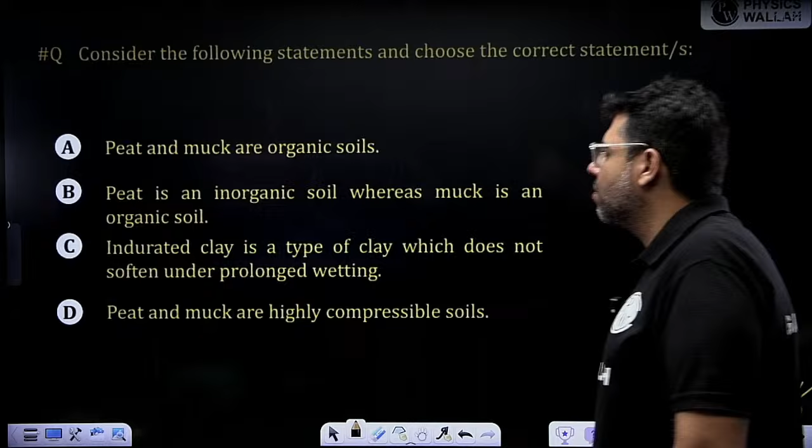So, correct answer is what? See, peat and muck both are organic soils. This one is correct, A is correct. Peat is an inorganic soil? No, peat is a highly organic soil, so this is wrong. Indurated clay - induration is the process of hardening of clay due to heat and pressure.

So indurated clays are hardened clays. They do not soften easily under prolonged wetting. This is hardened clay that is formed from the fusion of clays.

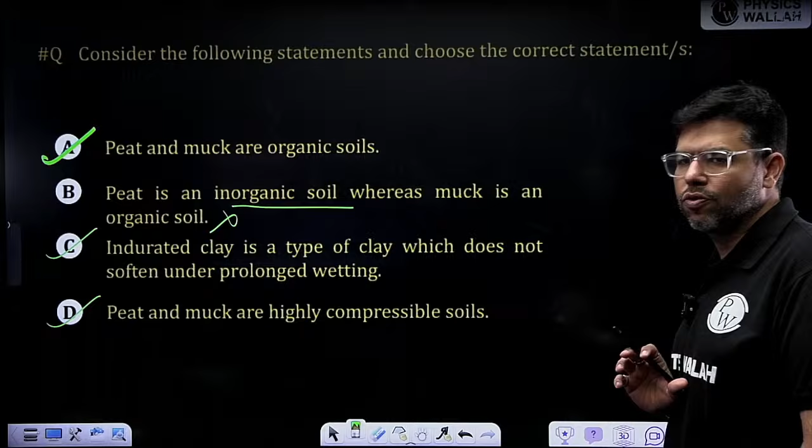So C is also correct and D is also correct. Peat and muck both are highly organic soils and both are highly compressible. Out of peat and muck, peat is more compressible, but both are highly compressible soils. So the answer is A, C, D.

These kind of questions you can very much expect in your exam as well. A, C, D - only 6 of you have given me the correct answer. Swagatam, very good. Vijay, then OG noob, I don't know your name, Ayush and so on. Very good.

Next question. Are you ready for the next question? Shall we see the next question now? Are you ready, my dear friends?

Let's see the next question now. Solve this one, mixing of soil. Very good question, I am giving you 2.5 minutes again.

Solve it fast. This kind of question we have done in our class as well. Make it fast please, then I will solve it for you.

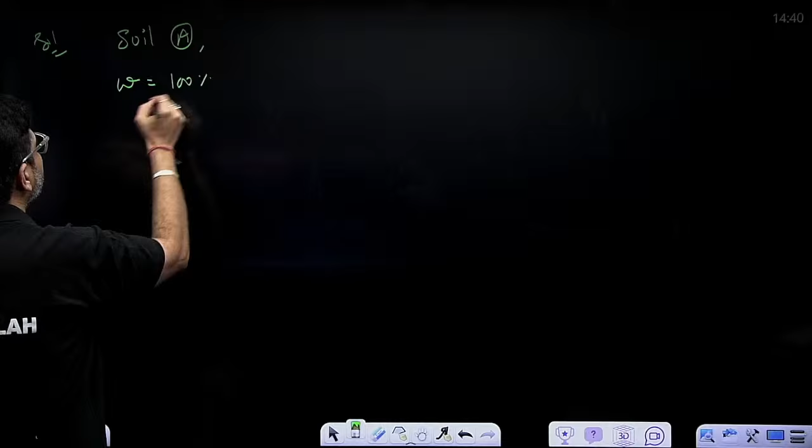Water content was given to me as 100%, weight is 1 kg. So weight of water plus weight of solids is equal to 1 kg.

Now weight of solids I can calculate first, that is total weight upon 1 plus W. 1 upon 1 plus 1, that is 0.5 kg. Weight of water is 1 minus 0.5, that is 0.5 kg again.

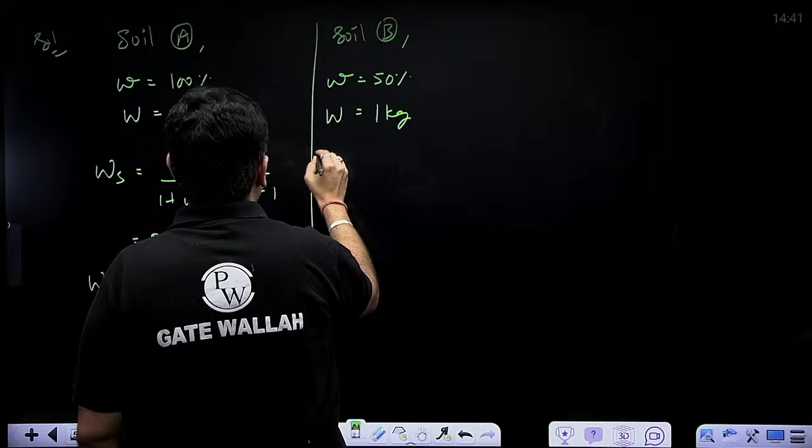Soil B: water content is 50%, weight is 1 kg. Weight of solid is total weight by 1 plus W again.

1 by 1 plus 0.5, that is 2 by 3 kg. Weight of water is 1 minus 2 by 3, that is 1 by 3 kg.

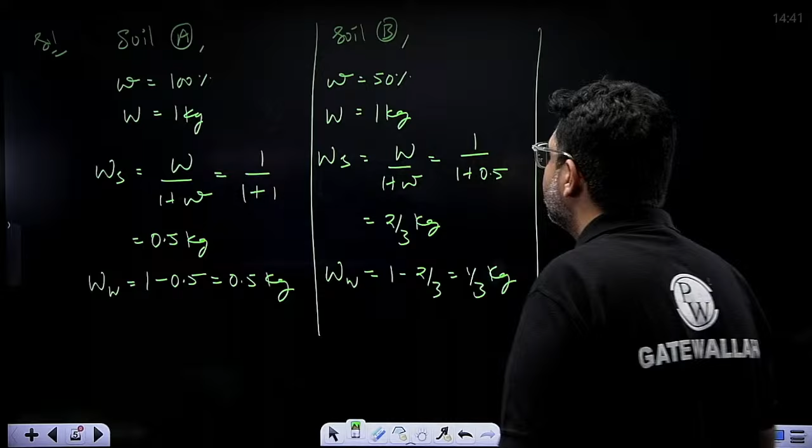Okay, done. So now, water content of the mixed soil for the mixture is weight of water by weight of solid. So when you mix those two soils, total weight of water will be 0.5 plus 1 by 3, and total weight of solid is 0.5 plus 2 by 3. Just individually add the solids as well as the water, okay.

Into 100, the answer will come out in percentage. What answer are you getting? Tell me fast, my dear friends.

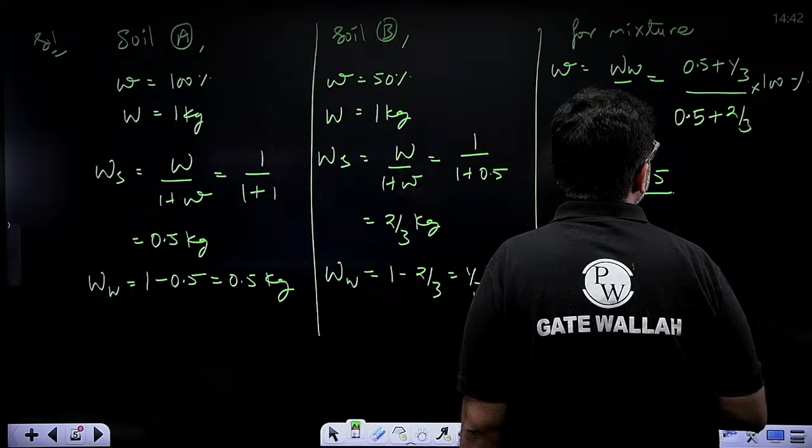Let me also calculate. So 0.5, okay, 3 5s are 15, so it is 2.5 divided by 3.5 into 100.

25 by 35 into 100. 71% you are getting, not 75%. Why have you given me the wrong answers? 71.43, approximately 71%, nearest answer. The closest answer is B. I don't know why have you all given me the wrong answers. B was the correct answer here.

Don't know how many of you were right here. Only 2 people, Master in Business and Ankit Yadav. Try to keep your correct name here, okay, that sounds good while reading as well.

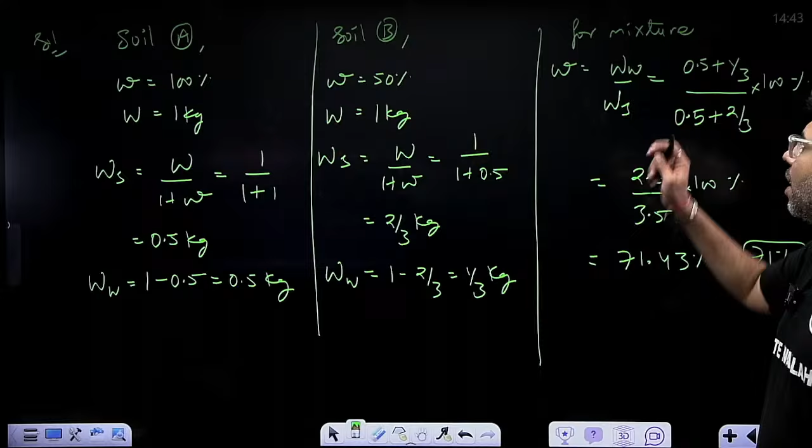Simple question though, not that tough. Chalo, let's do this question. Give me the answer in nearest integer, then only it will match. Give me the answer in nearest integer, okay. Report your answer in nearest integer, okay. This is also a good question, try to solve this.

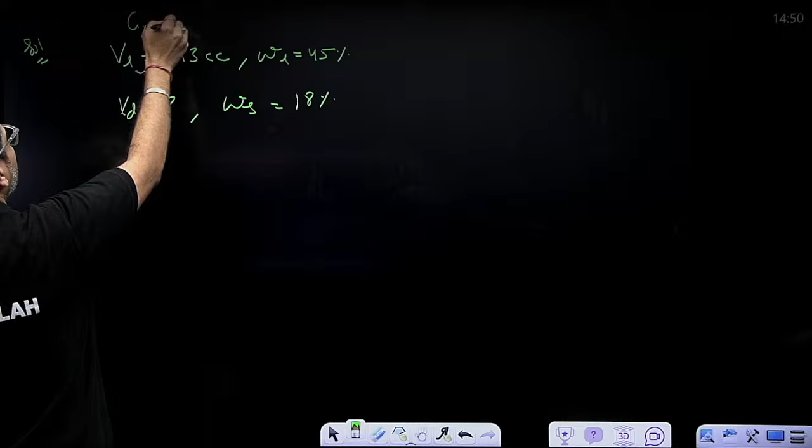Liquid limit was given to me as 45%. Now VD we have to calculate, that is minimum volume, and shrinkage limit was given to me as 18%. GS was also given to me. What was GS here? GS is how much, my dear friends? GS is equal to 2.73. Correct, very good. Now minimum volume which can be attained by the soil is, that is we have to find out VD, that is the dry volume corresponding to shrinkage limit.

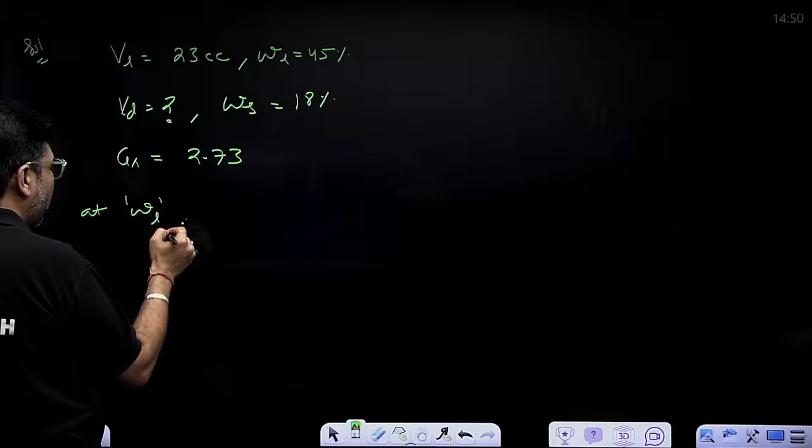We will find out. Now at WL, if I draw the phase diagram, I do not know any formula, I only follow the phase diagram approach. Solid volume will not change, weight of solids will also not change. Solid water, find out WS here, WS upon GS gamma W, GS I knew. This is WL, weight of water, WL into WS, it is WW, and volume of water is WL, WS upon gamma W.

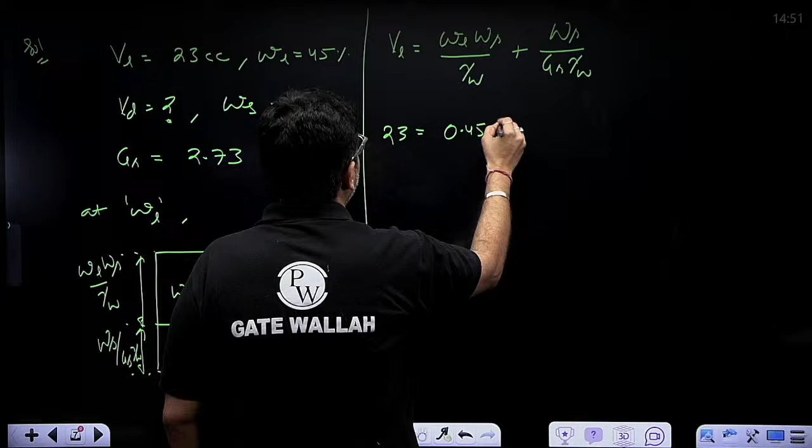Now VL is equal to what? WL, WS upon gamma W plus WS by GS gamma W, as simple as that. VL is 23 cc, liquid limit 0.45, WS I do not know, gamma W I will take it as 1 gram per cc, everything is in gram cc. WS I need to calculate, GS is 2.73.

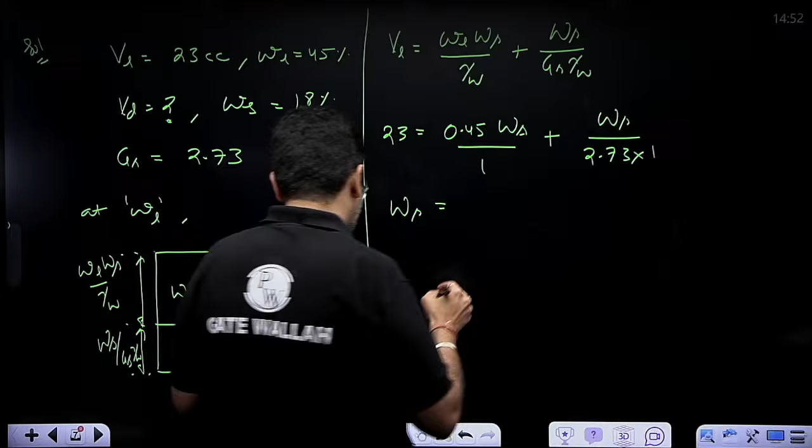Find out WS from here in grams, what is the weight of solids you are getting, and just substitute it to find out the VD. So WS is how much you are getting? 23 divided by 0.45 plus 1 by 2.73. 28.17, yeah, 28.176 grams, 176 grams.

Now at shrinkage limit, similarly we will write VD is equal to what? Just in place of WL, write down WS, weight of solids by gamma W plus weight of solids by GS gamma W. That's it, as simple as that. WS is how much, my dear friend? 0.18. 28.176 divided by 1 plus 28.176 divided by 2.73 into 1.

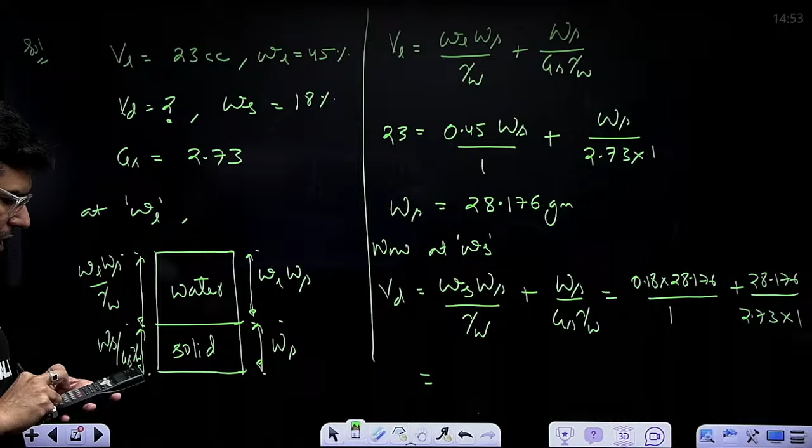So VD in cc you will get how much? Like this only you have solved. Nearest integer, I wanted the answer in nearest integer, my friend. You are not getting the instructions. Follow my instructions.

15.39. Someone have reported 15 as the correct answer, that was very much fine. 15.39 cc, nearest integer is 15 here. 15 was correct, okay. So if you are giving me 15 as the answer, that is very correct. Let's see how many of you have given.

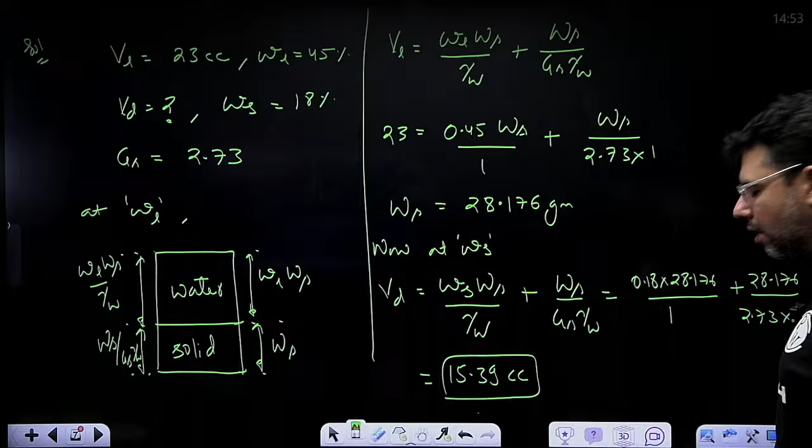Good question, many of you have given me. Vishu, Ankit, Ranjit, then Parth, Anvi, very good. Many of you have given me the answers, I am liking it. Let's see the next question, my dear friend. Very simple question on soil classification. Solve it fast, please.

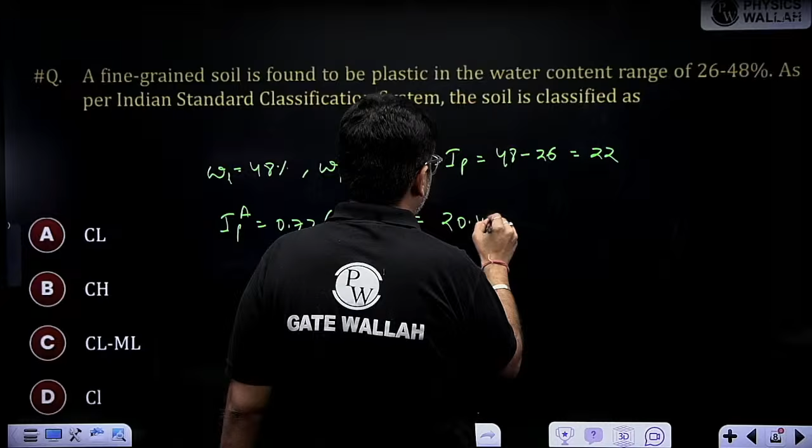Our IP is above this and liquid limit is less than 50%, and IP is greater than IPA. This implies CI, that is clay of intermediate compressibility, because it is above A line.

I don't need to show it, right? D is the correct answer. It will fall somewhere here, in this range. This point will fall somewhere here, IP and liquid limit above A line, that is in CI range. Okay, like this you can do this, very simple question to solve.

Any doubts here? These kind of simple questions also you can expect in your exam. D is the correct answer. Many of you have given me this.

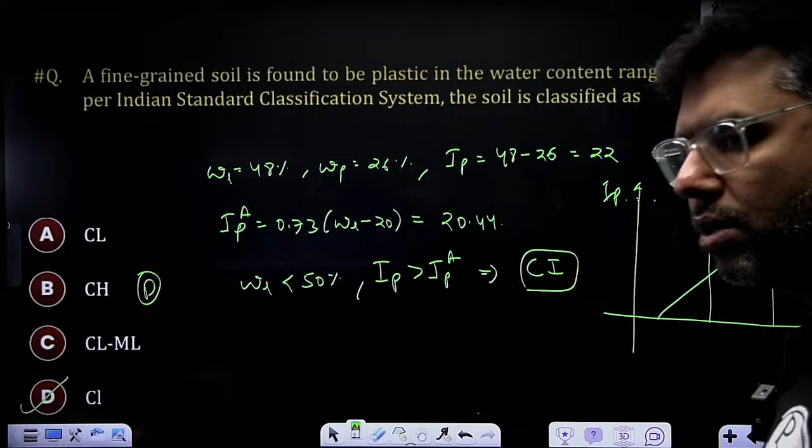Yeah, only seeing from WL you could have given the correct answer. Very good, so this kind of approach also you should have in exam. Just see the options, might be you can just eliminate the options easily. Without doing any detailed calculation also you can solve this question.

Very good. One question on compaction. Please solve this as well. Very simple question, please solve it.

MDD is the maximum dry density.

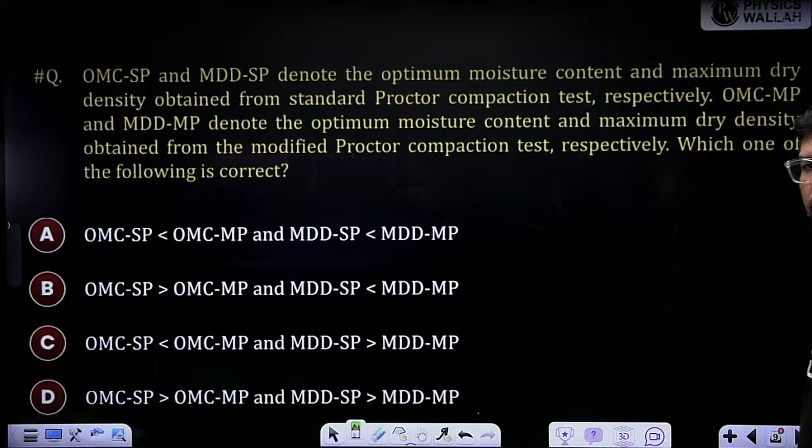So whenever you increase the compactive effort, we know our maximum dry density will increase and OMC should decrease, right? Maximum dry density increases and OMC decreases.

So maximum dry OMC of standard Proctor test will be more than OMC of modified Proctor test, and maximum dry density of modified Proctor test is more than maximum density of standard Proctor. B is the correct answer.

So due to increase in compactive effort, your maximum dry density increases and OMC decreases. B is the correct answer, my dear friend. MP is for modified Proctor test here.

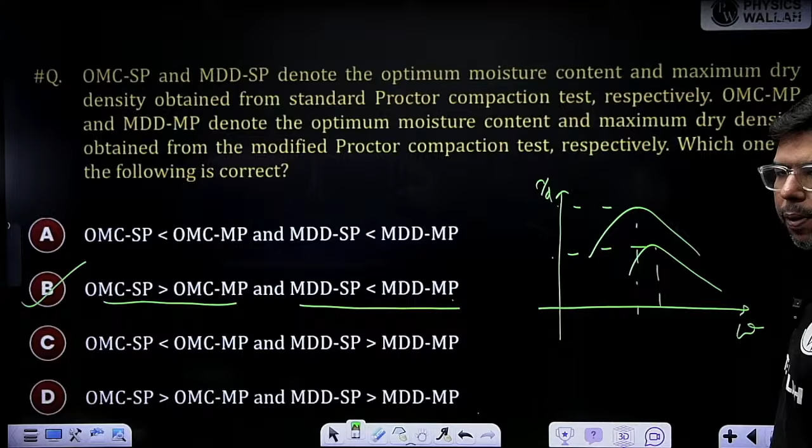Okay, B was the correct answer here. I don't know why many of you are giving me C as the answer, but B was the correct one.

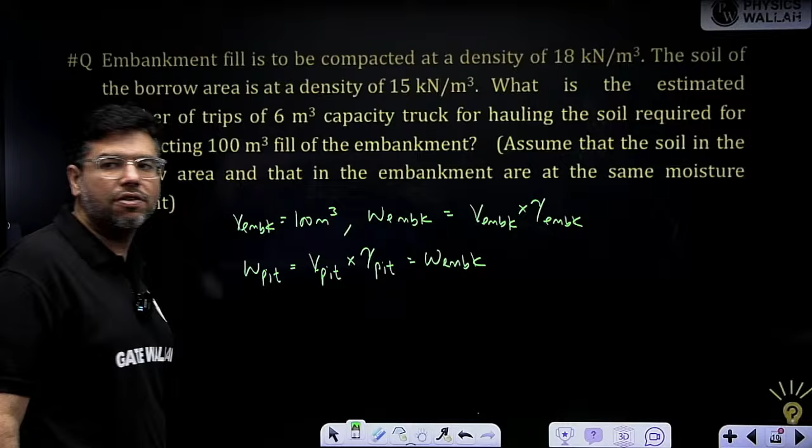This is equal to weight of soil in embankment because both the soils have the same moisture content, so the weight will be same. So therefore volume of soil in pit is equal to how much? Volume of embankment, gamma of embankment 18,

divided by gamma of pit, that is 15. How much answer you are getting? See, 3 5s are 15, 3 6s are 18, 5 20s are...

Are we doing, okay, yeah, 20 into 6, that is 120 meter cube. Number of trips is 20, that is volume of pit by 6, that is 120 by 6, that is 20 trips. C is the correct answer, my dear friend.

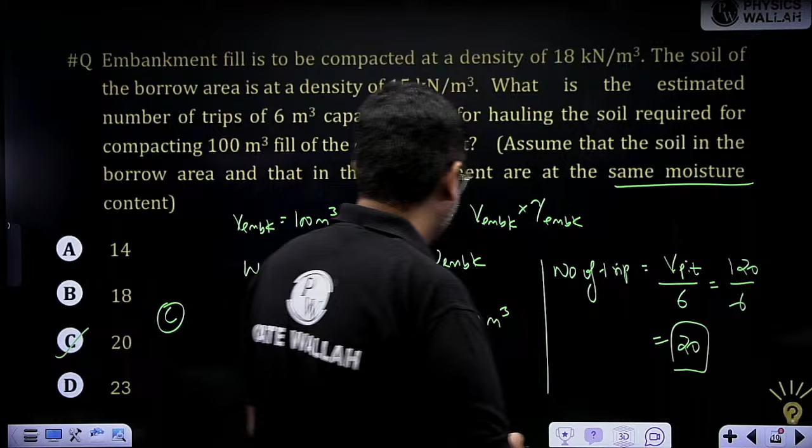Very simple question. Since here both were at the same moisture content, weight of the soil in pit as well as the weight of soil in embankment is same. So like this you could have solved it, very simple to solve. C is the correct answer.

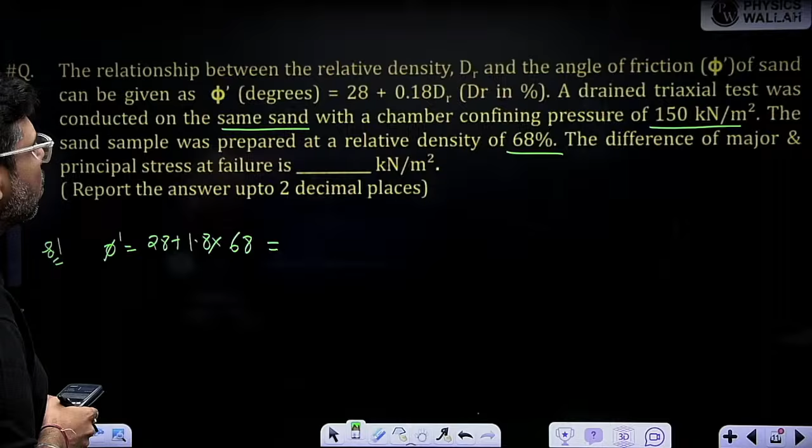Correction: it is 0.18, not 1.8. So 0.18 into 68 gives phi dash as 40.24 degrees.

Now, sigma 1f is equal to what? Sigma 3f was given to me as 150 kPa, and C equals 0 for sand. Sigma 1f equals sigma 3f tan square of 45 plus phi by 2. Sigma 3f bar was given, sigma 1f bar I am calculating, and C dash I will take as zero.

So sigma 1f bar minus sigma 3f bar equals sigma 3f bar into tan square of 45 plus phi dash by 2, minus 1. Sigma 3f bar is 150, into tan of 45 plus phi dash by 2, where phi dash is 40 point something.

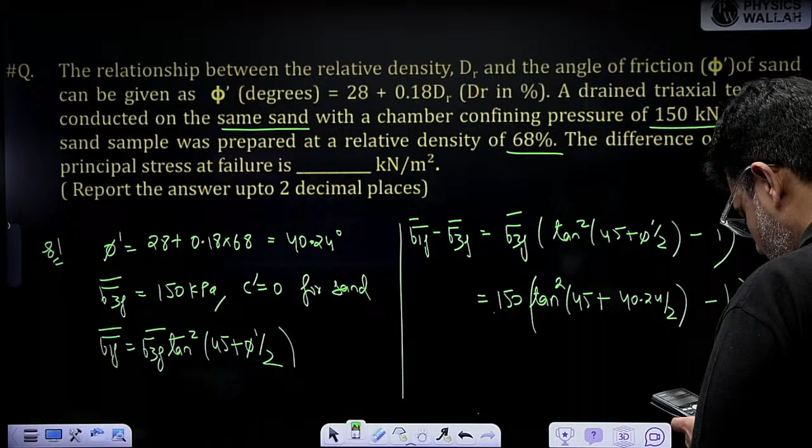Huh? Nitesh, Gaurav, Triple, Swagatam, very good, many answers I have got here. Let us proceed further again.

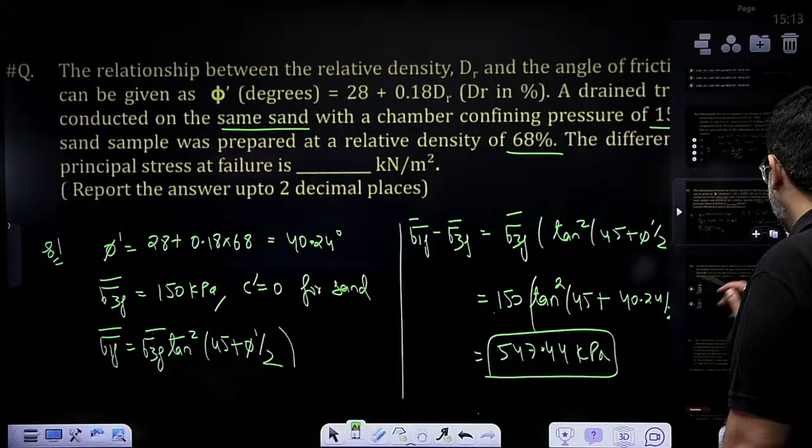Let us see this question. Try to solve this question, very simple again. Please solve this one now. This type of question has been asked many times in your exam.

Try to solve it, please. You have to transform y, not x. Yt is transformed. Only one option is correct here, my dear friend.

A and C are the same, by mistake. There is a misprint in the question. Wait, I am correcting the question again. It should be under root kV by kh.

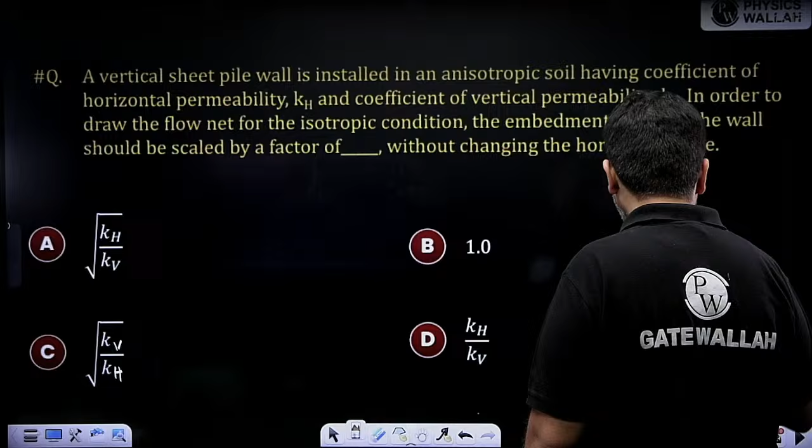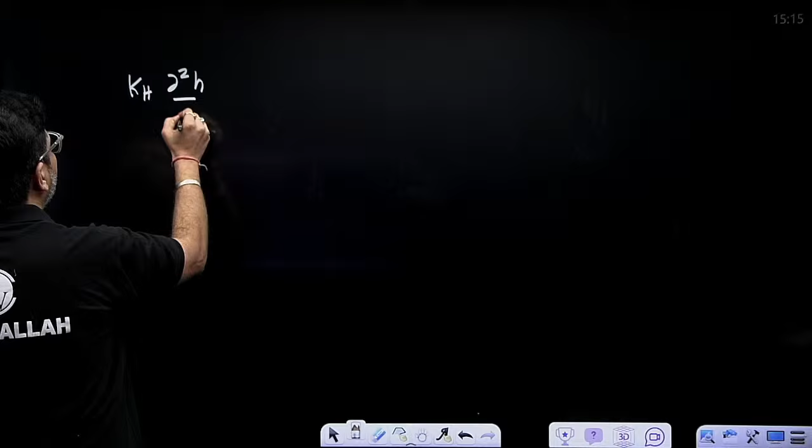Type the correct answer. So here we have a vertical sheet pile installed in an anisotropic soil. Vertical permeability is Kv, horizontal is Kh. In order to draw the flow net, the embedment depth of the pile should be scaled by a factor. So Yt should be changed, Xt is x is constant. We know Kh del square h by del x square plus Kv del square h by del y square equals 0, divided by Kh. So del square h by del x square plus Kv by Kh del square h by del y square equals 0. This implies del square h by del x square plus del square h by del of square root of Kh by Kv into y square equals 0.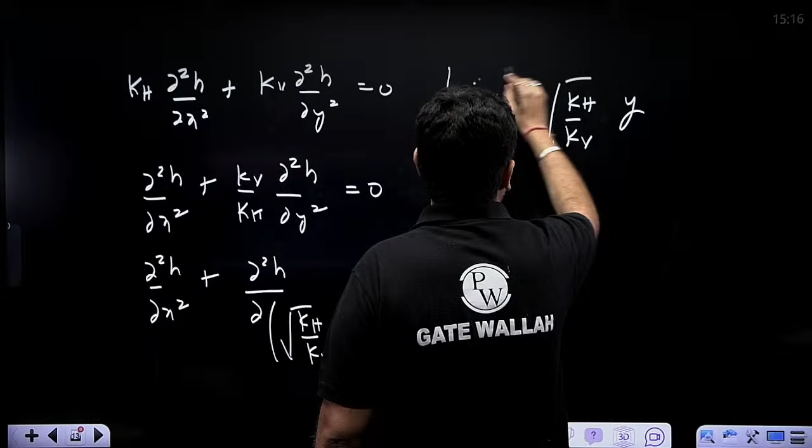So y transformed equals what? Square root of Kh by Kv into y. This is my correct answer here. So your transformation or the factor for transformation is under root Kh by Kv, that is A is the correct answer.

Almost all of you have given me the correct answer, I guess. Very simple question. If x was transformed, in that case under root Kv by Kh is the correct answer. Only 6 answers I got correctly. I don't know why the polls are not taking all the answers, but I can see many of you have given the correct answer. Anyways, A is the correct answer. Very good, my dear friend. Let's see the next question.

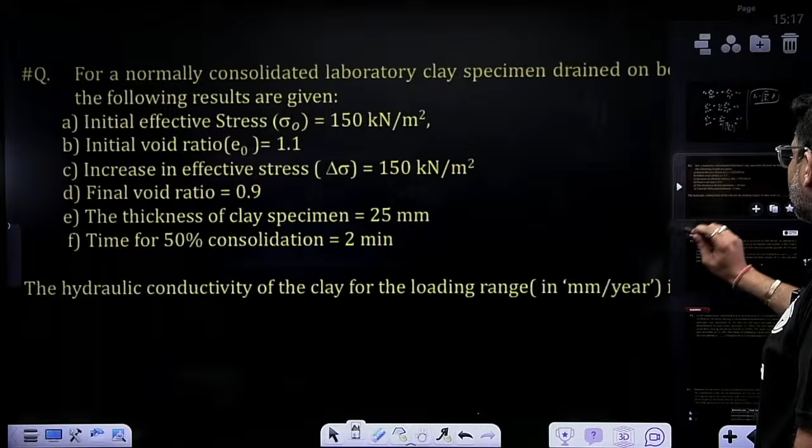Next question, let us see the next question. Very good question on hydraulic conductivity. Report your answer in nearest integer again. Do it fast.

Very good question, please try to solve this out. Try to solve this, nearest integer I want done. Very good question, try to solve it.

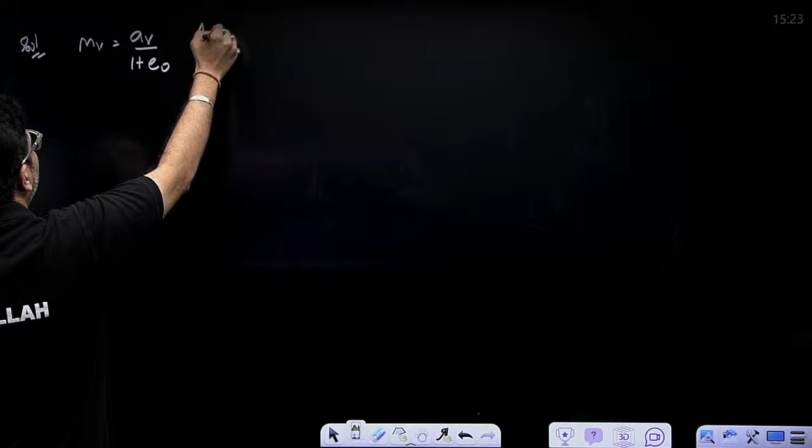So let us start. First, MV is equal to AV upon 1 plus E naught. AV is delta E upon delta sigma bar, upon 1 plus E naught. Delta E is 1.1 minus 0.9. Delta sigma bar is 150 only. 1 plus 1.1 is equal to how much?

What is the value of MV I got? I have calculated it for you: 6.35 into 10 raised to the power minus 4 meter square per kilonewton. Please see the units also.

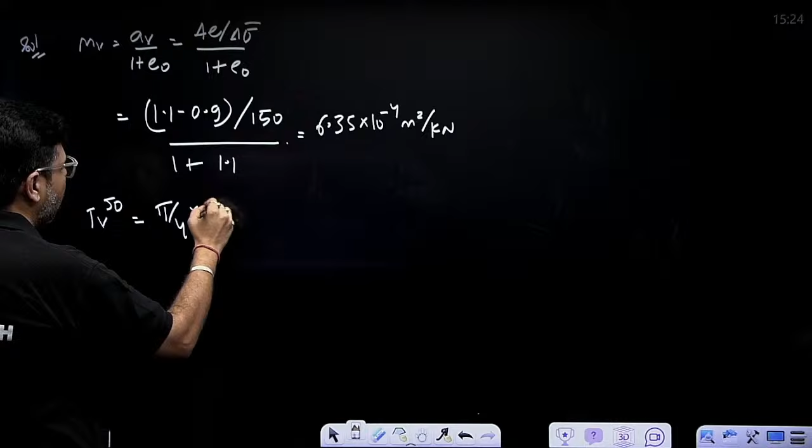Now U50, TV50 is equal to pi by 4 into U50 square, that is 0.5 square, because U is 0.5 here. So TV50 is equal to 0.197.

Now TV50 is equal to CV into T50 upon H square. So CV is equal to TV50, that is 0.197 into H square. Drainage path: drainage is on both sides, thickness is 25, so H is equal to D by 2 here. So 25 by 2 whole square, upon T50 that is 2 minutes. This will come out in mm square per minute.

So answer CV, what you got? That is 15.39 mm square per minute.

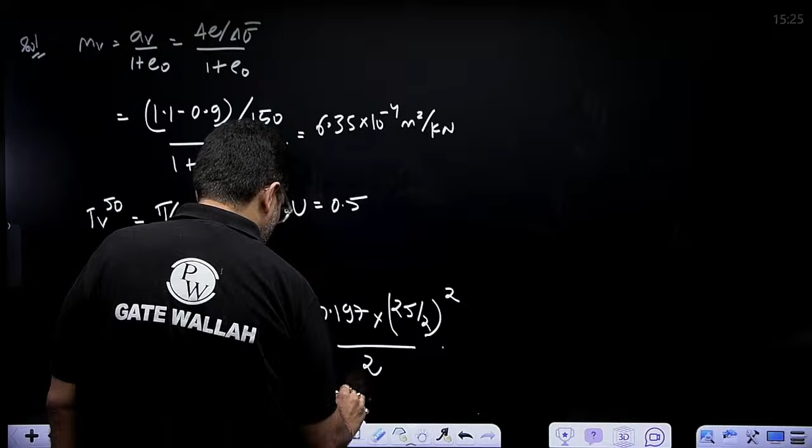So therefore K is equal to MV into CV into gamma W. MV is 6.35 into 10 raised to power minus 4. CV is 15.39, convert it into meter, into 10 raised to power minus 6 meter square per minute. Gamma W is 9.81. So answer will come out in meter per minute.

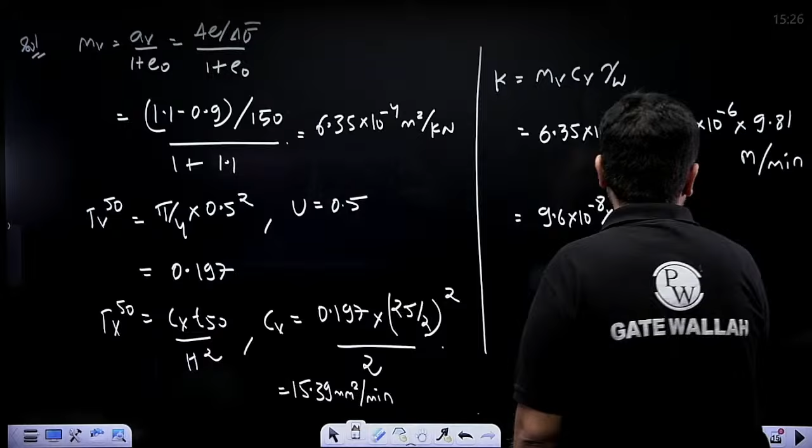And we want the answer in mm per year. So first tell me what answer I am getting here: 9.6 into 10 raised to power minus 8. Convert meter into mm and minute into years: minute to hour, hour to days, days to year. This will give me mm per year.

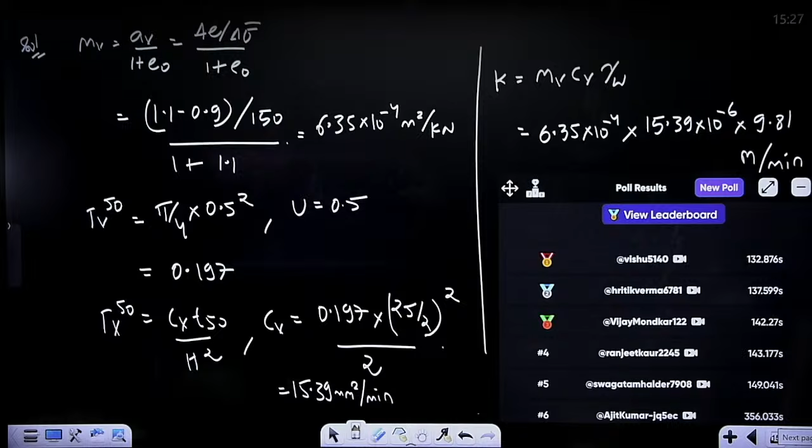Like this only you have solved. So final answer, what are you getting? I got the answer as 50.457. Very good question, though it seems to be complex but not that complex, so nearest integer is 50. Many of you have given me 50 as the answer. Last year this type of question was asked in GATE as well, so 50 was the nearest integer. Vishu, Hritik, Vijay, Ranjeet, many have given me 50 as the correct answer. Very good question, but not that difficult.

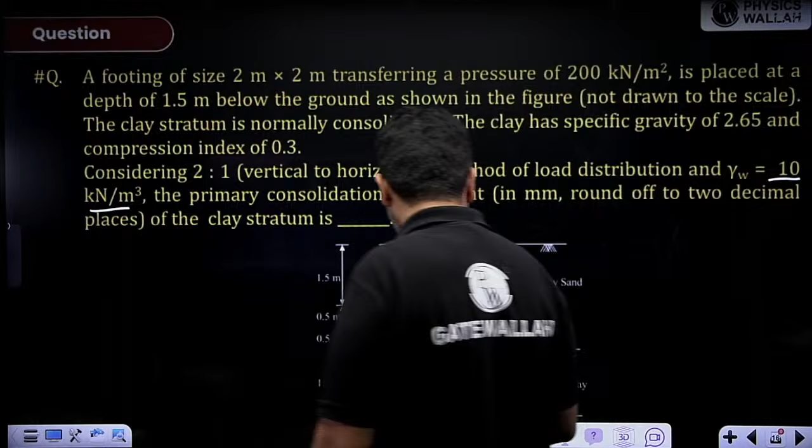So total stress above water table is 15 into 2, plus gamma submerged. Gamma submerged is 18 minus 10, that is 8. So 8 into 0.5, and 7 into 0.75. How much are you getting here? That is 39.25 kPa.

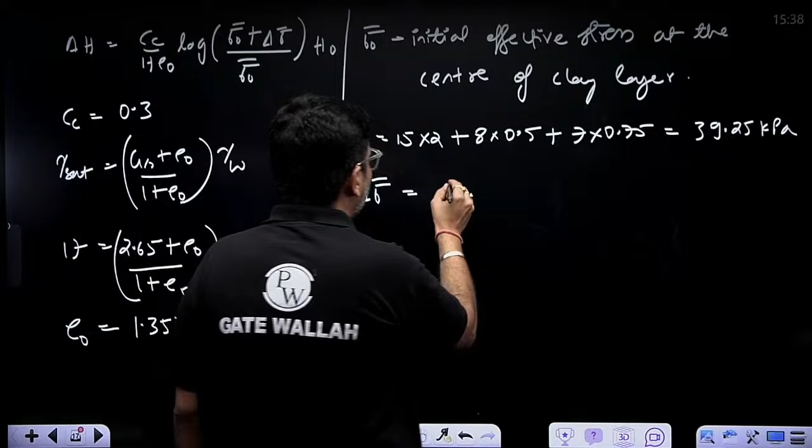Now delta sigma bar is the change in effective stress at the center of clay layer by trapezoidal method, considering 2 vertical is to 1 horizontal load distribution. Directly I am writing it, Q into B square divided by B plus Z whole square. Q is 200 into 2 square. Depth from here is 0.5 plus 0.5 plus 0.75, that is 1.75. So 2 plus 1.75 whole square. This is my delta sigma bar. Tell me fast, how much you are getting here. So delta sigma bar I got as 56.889 kPa.

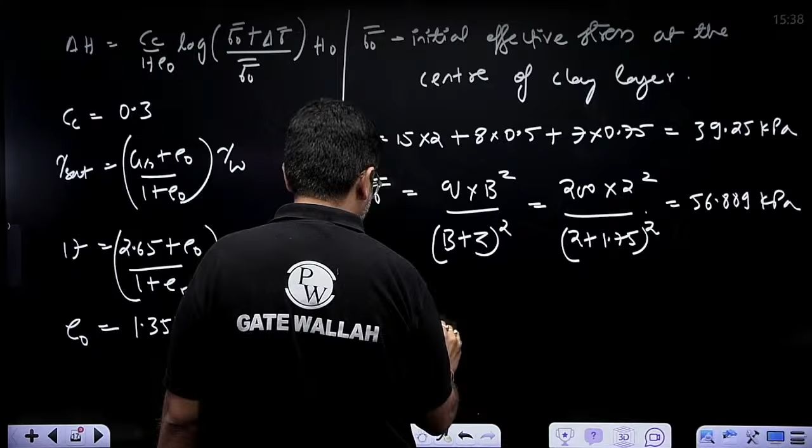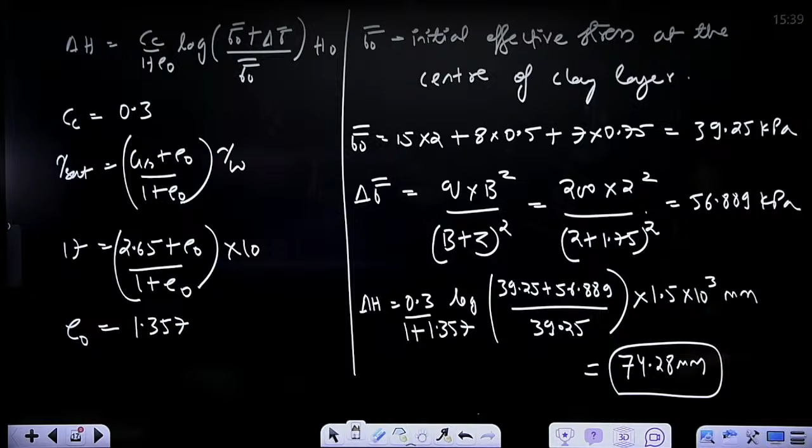Put everything in this formula. Delta H is equal to Cc by 1 plus e naught, log of sigma naught bar 39.25 plus 56.889, divided by sigma naught bar 39.25, into H naught, the thickness of clay layer. H naught is 1.5 meter, convert it into mm. Tell me fast, how much are you getting for delta H? 74.28 mm. Nearest integer would be 74 here. Interesting question, but not tough. 74 was the nearest integer. I am seeing 74.26, these are also acceptable, but I told you to find the answer in nearest integer. So the correct answer in nearest integer is 74.

Some of you have given me Cal, Vijay, Keshav. See, calculative questions will also come in the exam.

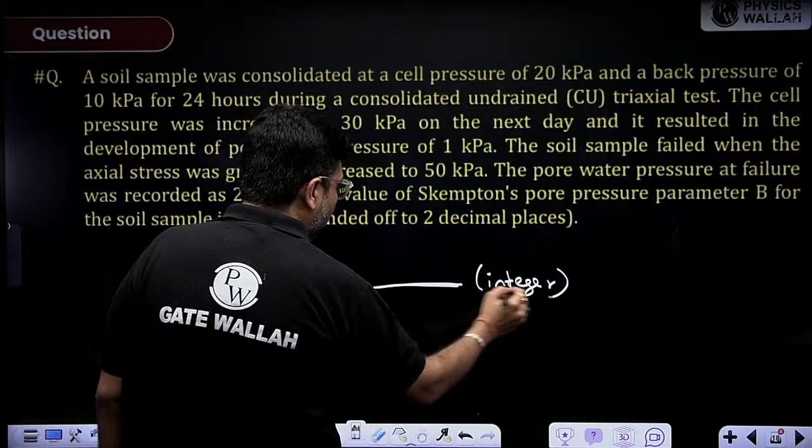One question on Skempton, write down the value. To report your answer, do B into 100 and then nearest integer. Whatever B you are getting, multiplied by 100, then report your answer in nearest integer. Do it fast, please. Find out B here.

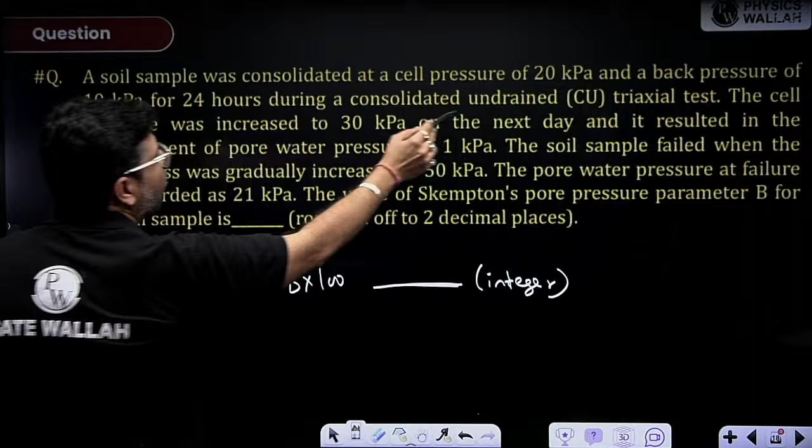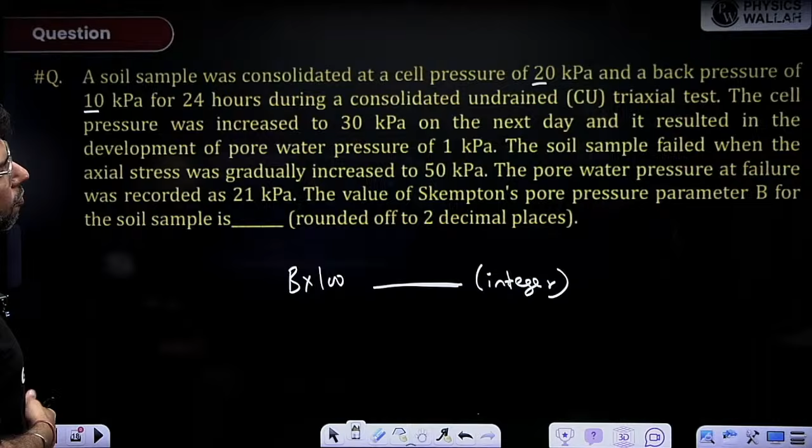A sample of soil was consolidated at a cell pressure of 20 kPa and a back pressure of 10. Back pressure will always be there. So initial net pressure is 10 kPa, that is 20 minus 10. The cell pressure was increased to 30 the next day and back pressure is still 10. This resulted in the development of a pore water pressure of 1 kPa. Delta sigma 3, back pressure was given just to confuse you. Delta sigma 3 is simply 30 minus 20. Earlier it was 20, now 30, so 10 kPa. Due to this, delta U is equal to 1 kPa. We have to find out B only, so only this data was needed. B is delta U upon delta sigma 3, 1 by 10, that is 0.1. Now B into 100, 0.1 into 100, that is equal to 10. 10 was the answer I was expecting from you. I told you to report your answer in integer by multiplying B by 100. So 10, many of you have given me Jumpu, Keshav, Parth, but many of you are not able to solve the questions, that is not good at all.

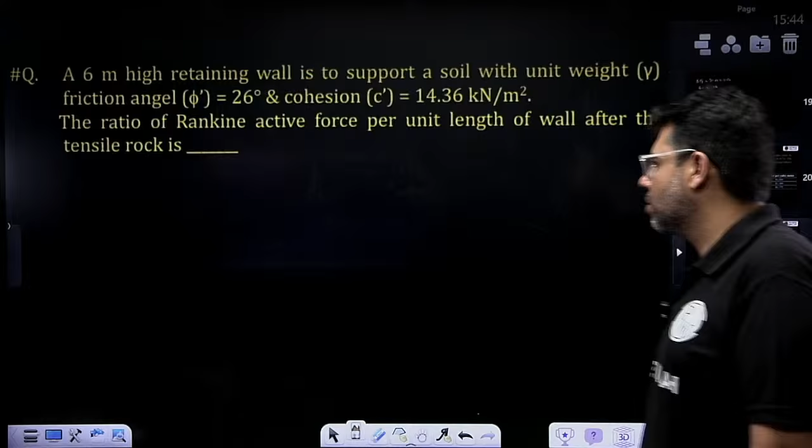Anyways, try to do this question. The Rankine earth pressure force you have to find out here. Find out the Rankine active force after the occurrence of tension crack. Again report your answer in nearest integer. I am waiting, do it fast. I want the answer in nearest integer, waiting for answers.

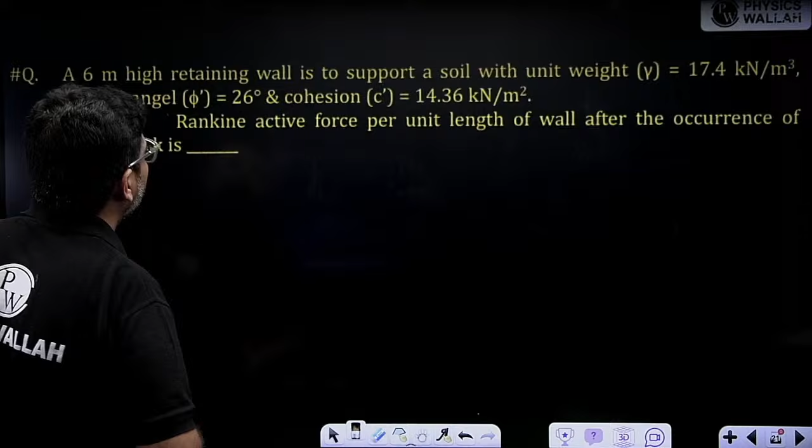So first find out K here. We have to find out the Rankine active earth pressure force. Height of retaining wall was given to me. So K is what? K is 1 minus sine phi upon 1 plus sine phi. Just tell me the calculation, what value of K you have got. K I have got as 0.39.

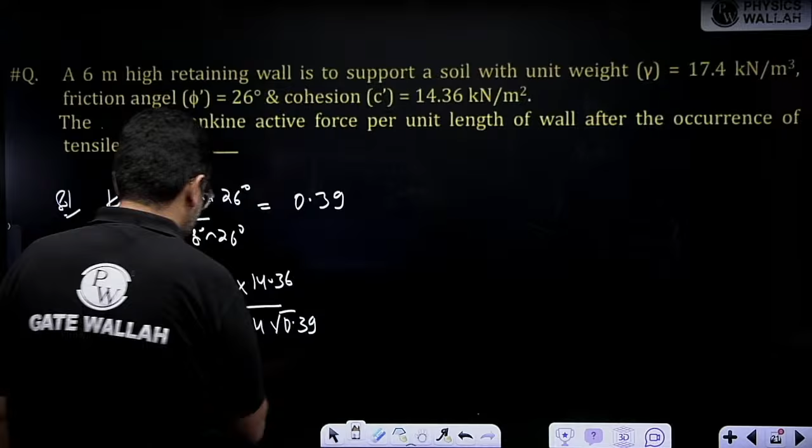Then just find out the depth of tension crack. This is the depth of tension crack, that is Z0 is equal to 2C by gamma under root K. 2 into C, that is cohesion, was given. Okay, 14.36. Gamma is 17.4, square root of 0.39. So Z0 in meters you are getting here, how much? Depth of tension crack is 2.64 meters.

Now this is my earth pressure diagram here. It is 0 at 2.64 meters. Remaining is this, that is 6 minus 2.64 is 3.36 meters. So PA, how much you are getting here? What is the value of PA here?

PA at this point at Z is equal to 6 meters. PA is K gamma Z minus 2C under root K. Under root K is how much? That is 0.39. So PA at 6 meters, I got how much? 22.766.

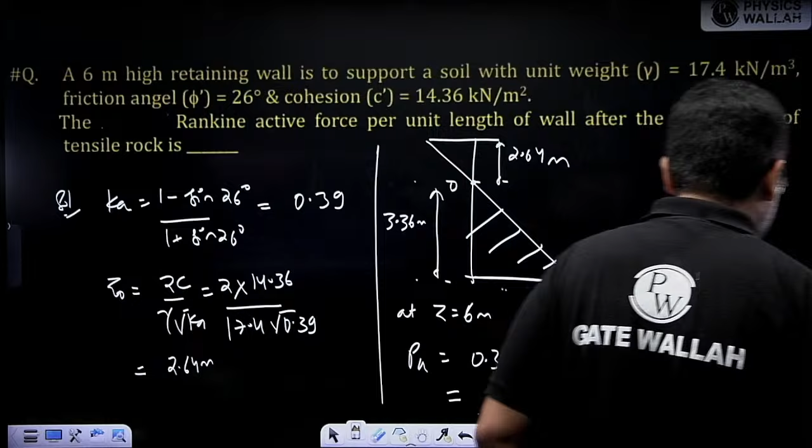Now FA is area under this triangle. So FA is equal to half into 22.766 into 3.36. That is equal to how much? I got the answer as 38.246.

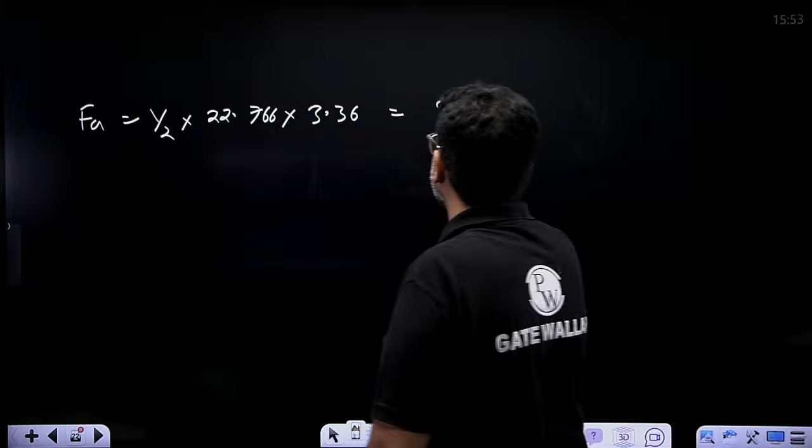Simple question, nearest integer was 38 here. I told you to report the answer in nearest integer, 38. Only 2 students gave me the correct answer, Jumpu and Keshav. Why are you not able to answer these questions?

Anyways, let's proceed further. Let's see a few more questions here. One question on pile foundation, please solve this as well. Solve this as well, make it fast. Try to solve this question, make it fast please.

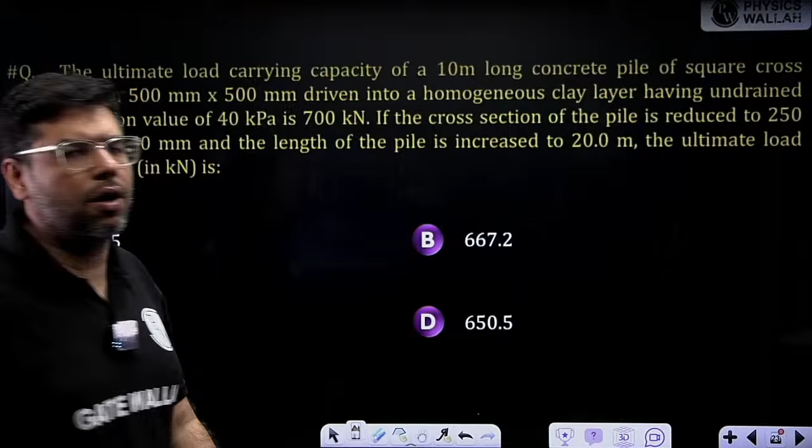Try to solve this question. This is a simple question on pile foundation. Ultimate load carrying capacity for a 10-meter long concrete pile of square cross section driven into a homogeneous clay layer having undrained cohesion 40 kPa is 700. If the cross section is reduced to 250 and length is increased, the ultimate load carrying capacity is what?

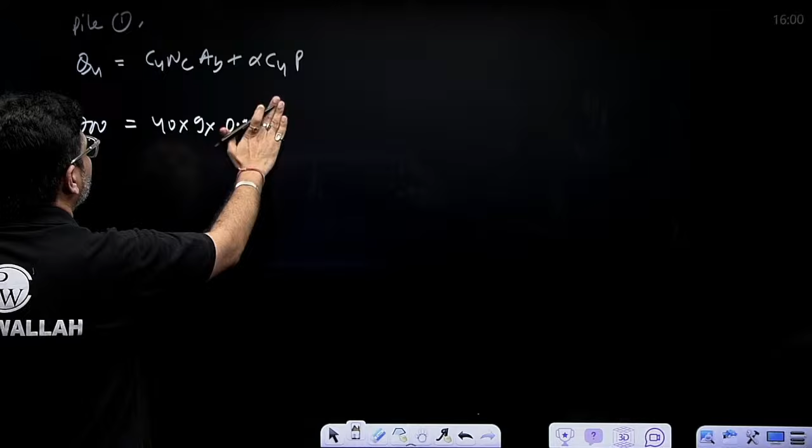First find out QU. QU is equal to CU NC into area of base plus alpha CU into perimeter. So QU is how much here for the first case, for pile 1. So 700 is equal to CU, CU is 40, NC is 9, and area of base is 0.5 meter square. P into L, we'll do area of surface.

Alpha I do not know, I have to find it out. 40 into 4 into 0.5, initial length was how much? 10 meters. So from here you can solve and find out the value of alpha. So I have solved the value of alpha from here, 0.7625.

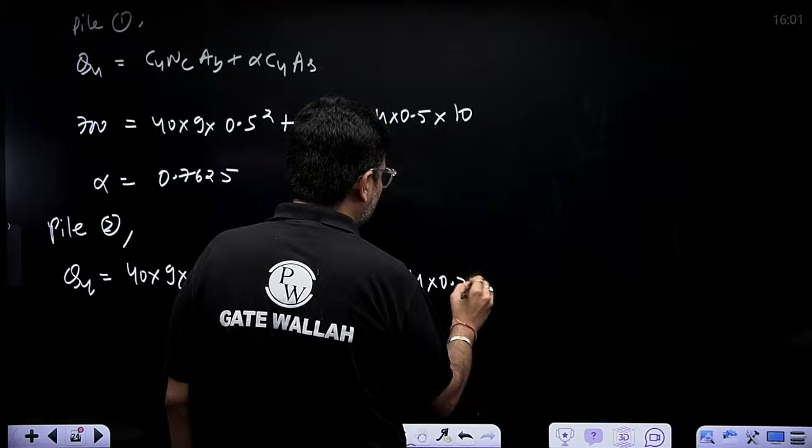Pile 2: QU is equal to 40 into 9 into 0.25 square plus 0.7625 into 40 into 4 times 0.25, and length was increased to 20 meters, right? Correct. So QU how much you got? Very simple question on pile. 632.5 kilonewton, okay, this is the answer you got, that is answer C. Answer is C here my dear friend, very correct answer.

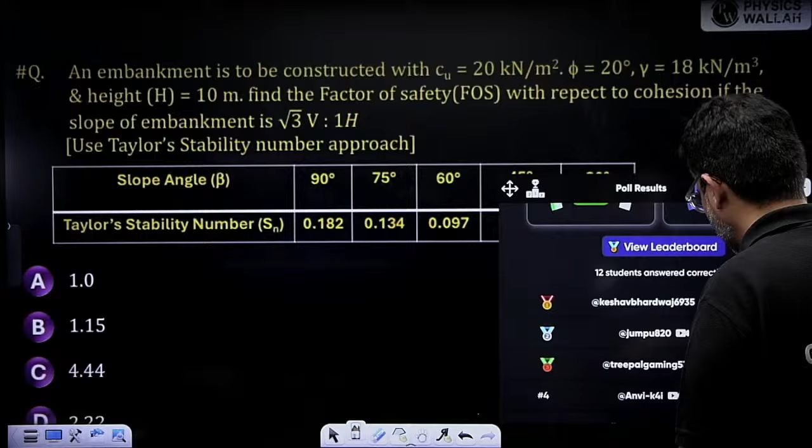Now let us see one question on Taylor stability number as well, try to solve this one too. C was the correct answer, many of you have given me the answer, very good. First one was Keshav, then Jumpu, Mr. Treepal. Now tell me the answer of this question, make it fast. Try it out please, make it fast. Simple question again.

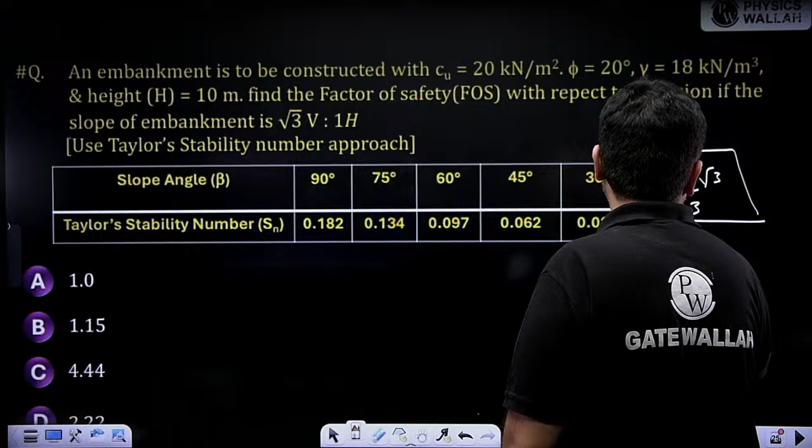Find out the value of Sn here. The embankment is to be constructed. Cu, phi, everything was given. Find the factor of safety with respect to cohesion. If the slope is root 3 vertical is to 1 horizontal, so beta is how much? Tan beta is equal to root 3, so beta is 60 degrees. For beta 60 degrees, Sn is this. So Sn is equal to C upon gamma H Fc, that is 0.097.

We have to find out the factor of safety with respect to cohesion. So Fc will be equal to C, cohesion is 20, gamma was 18, H was given as how much? Height is 10 meters. 0.097, this is the factor of safety with respect to cohesion.

Like this you will calculate 1.15. Very simple question. These kind of questions also you can expect in your exam.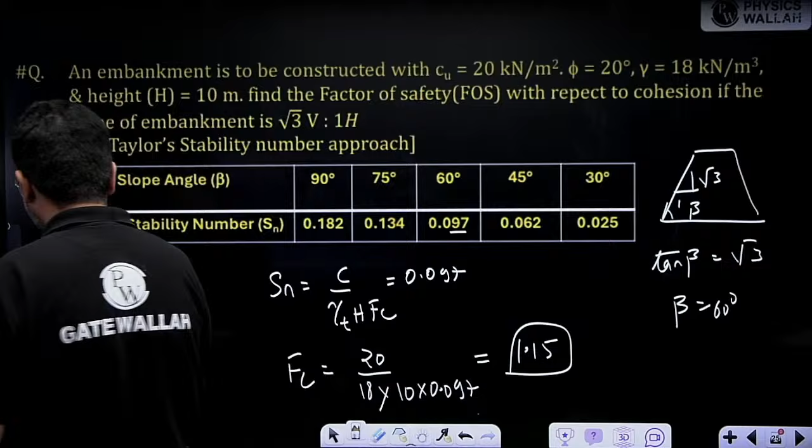B is the correct answer. So if you are giving me B as the answer, it is very correct. Many of you, almost all of you, have given me the same answer. Very good, next question please.

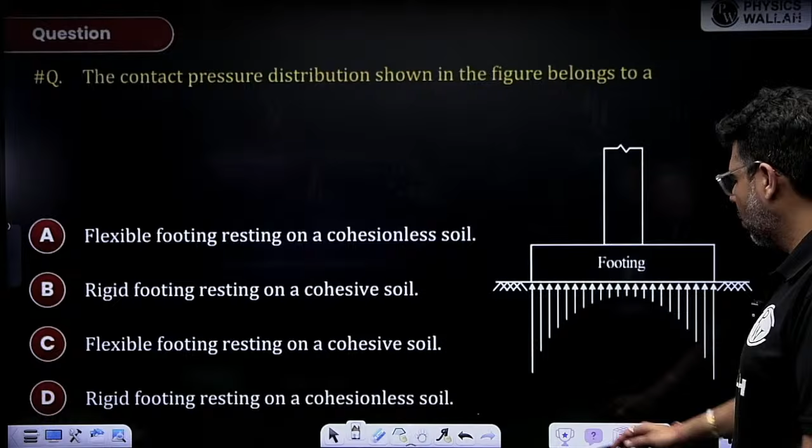Almost all of you have given me the correct answer - Rishi, Samarth, Kendru and so on. Very good, solve this question as well. Try to attempt this one as well. Do it fast.

This type of question is also many times asked in your exam.

Do it fast. B is the correct answer here. For rigid footing in cohesive soil, rigid footing gives non-uniform stress distribution, and for cohesive soil you will get this kind of convex pressure distribution. B is the correct answer here.

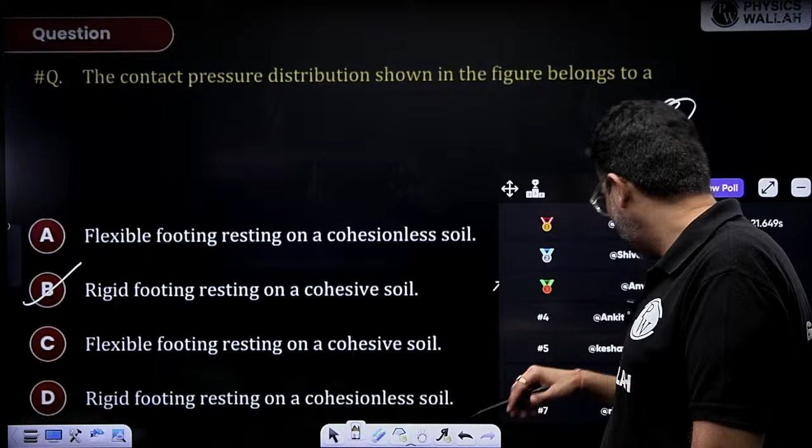B is the correct answer. Nitin, Shivam, Anvi, Ankit, very good. Many of you have given me the correct answers.

Let's do few more questions. Attempt this one also. Report your answer in nearest integer again. Do it fast.

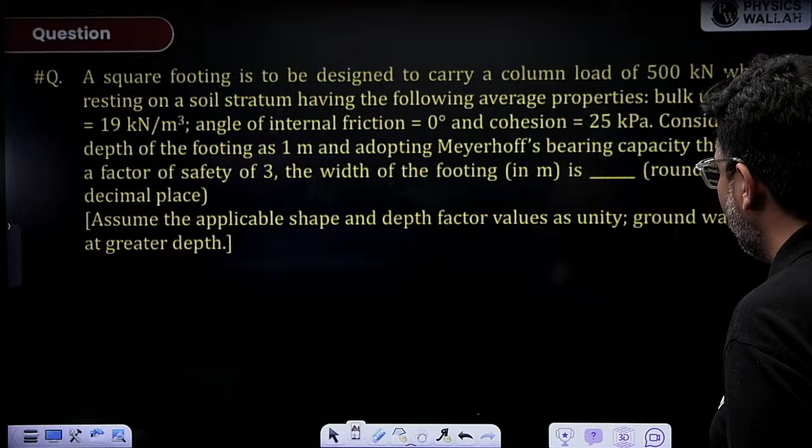Solve this one. So we have a square footing to carry a column load of 500 kilonewton which is resting on a soil stratum having following average properties: bulk unit weight, angle of internal friction is 0, cohesion is given to me, considering depth of footing as 1 meter, adopting Meyerhoff's bearing capacity theory with factor of safety of 3, find width of the footing. Assume applicable shape and depth factor, all factors are taken as 1 only. Let us try to solve this now.

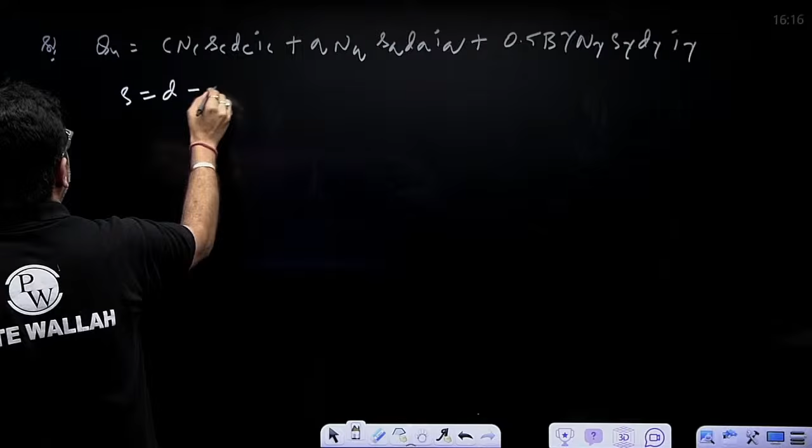Let us try to solve this. So applicable shape and depth factor is taken as 1 only. So as per Meyerhoff, ultimate bearing capacity equals C NC SC DC IC plus Q NQ SQ DQ IQ plus 0.5 B gamma N gamma S gamma D gamma I gamma. All these factors are 1 only, that is S equal to D equal to I equal to 1. So QU is equal to what?

C NC, cohesion is 25. NC is how much? NC for phi equal to 0, NC is taken as 5.14. NQ is 1, N gamma is 0.

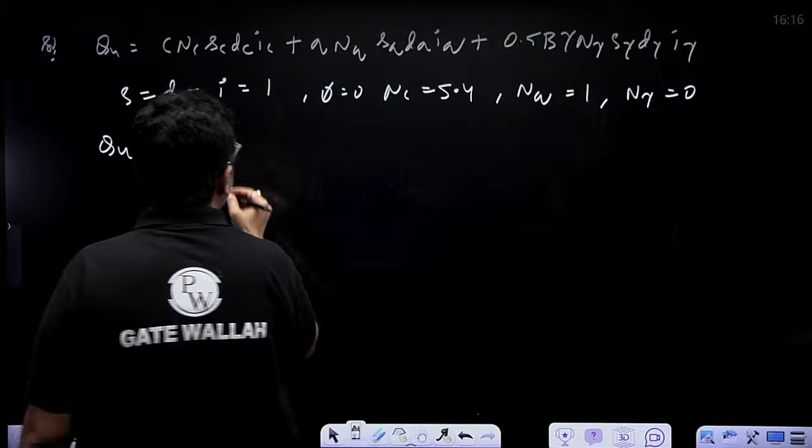So 5.14 plus Q NQ. Q NQ is equal to how much? Gamma T DF. Gamma T is 19. Depth of the footing is 1 meter. So Gamma T DF and NQ 1.

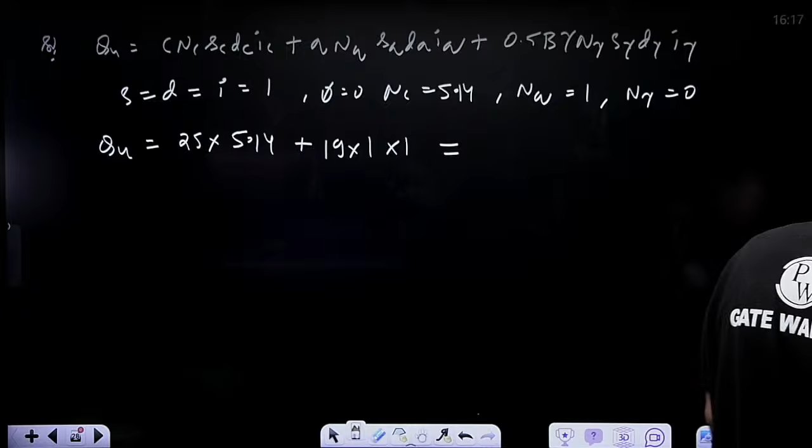So QU is coming out to be how much, my dear friend? 147.5, small QU, ultimate bearing capacity. So this I got as 147.5 kPa.

Now QNS is equal to QNU by FOS, that is QU minus gamma T DF, by FOS. 147.5 minus 19 into 1, divided by FOS which is 3, is equal to 42.83.

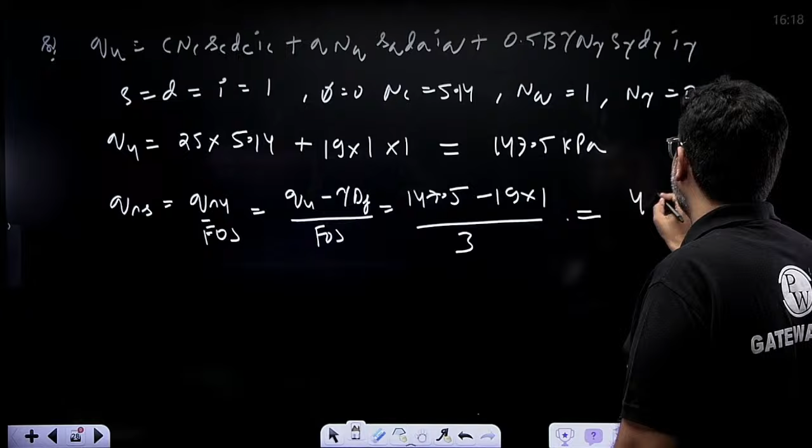Let us keep this as the last question for today's session. So for safety, P by B square should be less than equal to QNS. So your B should be greater than equal to square root of P by QNS, that is 500 by 42.83. So this is 3.4 something, 3.4 meters.

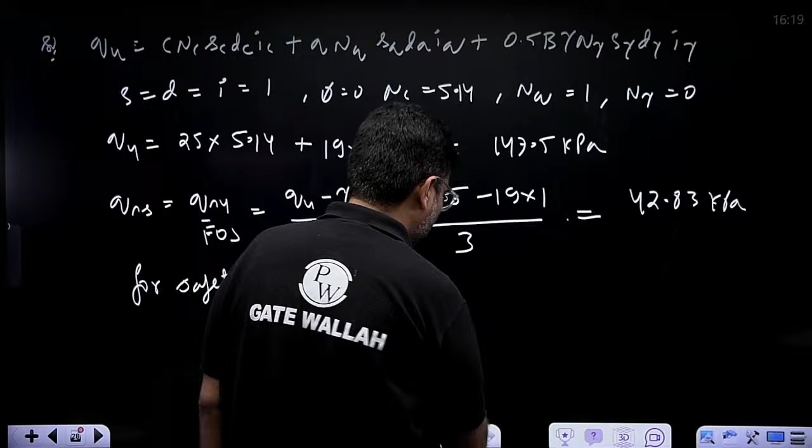So I told you to report the answer in nearest integer, that is 3 meter. If you are reporting, it's okay. So many of you have reported the answer, very good.